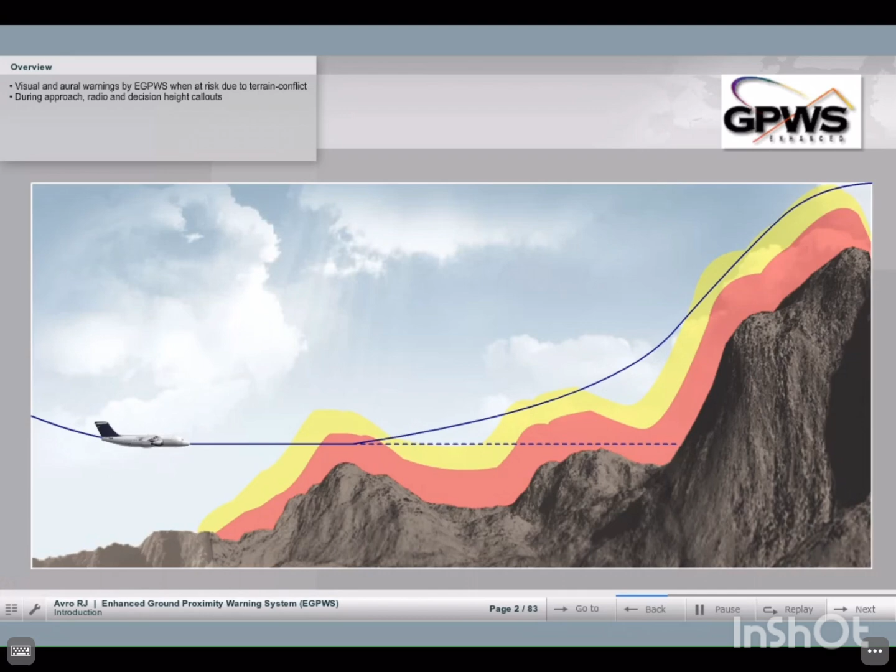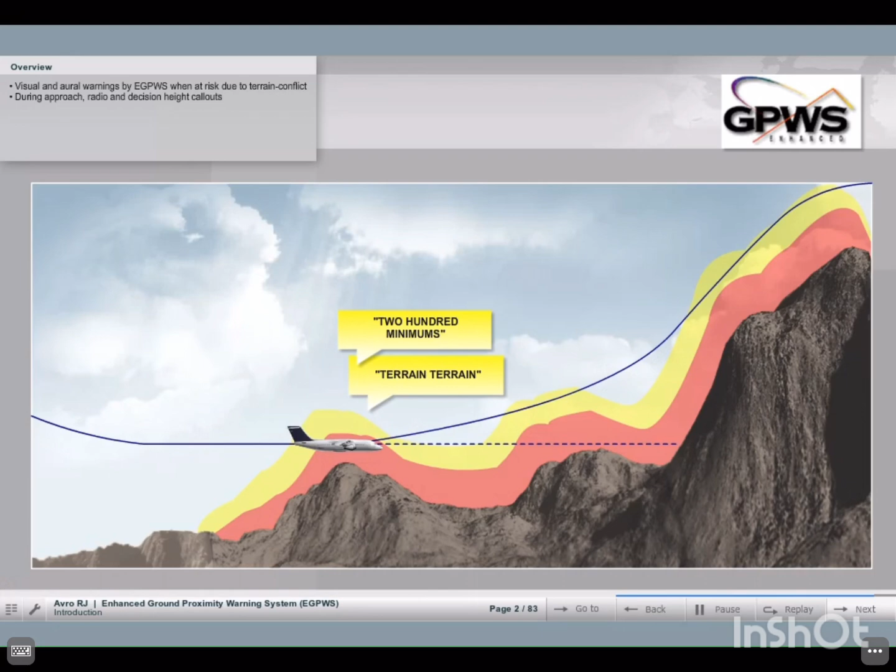The Enhanced Ground Proximity Warning System, EGPWS, is designed to give both visual and aural warnings when the safety of the aircraft is considered to be at risk due to possible conflict with terrain. Terrain, pull up. During the approach phase, EGPWS also gives radio altitude and decision height callouts. 200 minimums.

EGPWS incorporates the functions of the basic GPWS as well as intelligent, enhanced alerts computed through comparison of position and flight path data with an internal terrain and obstacle database.

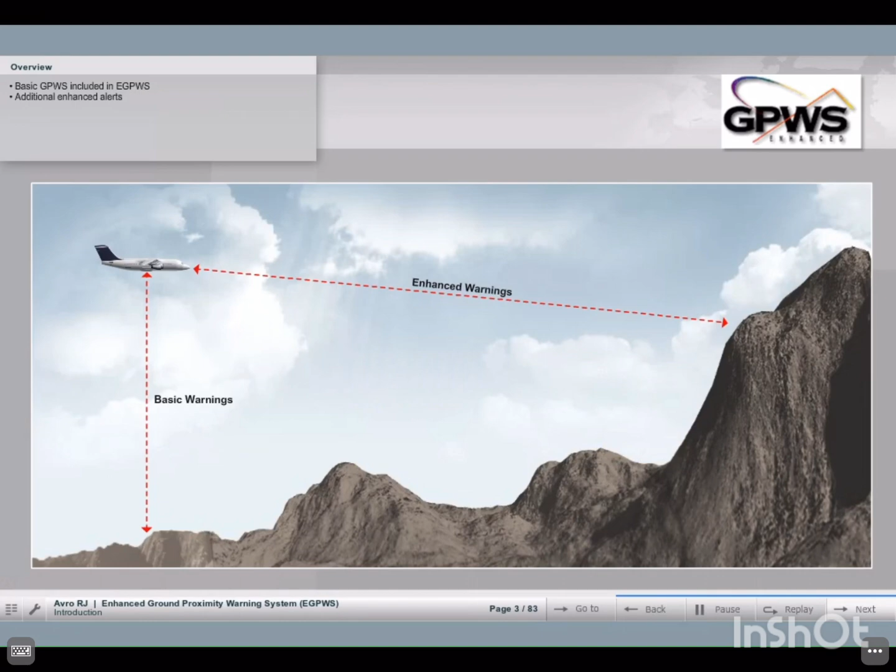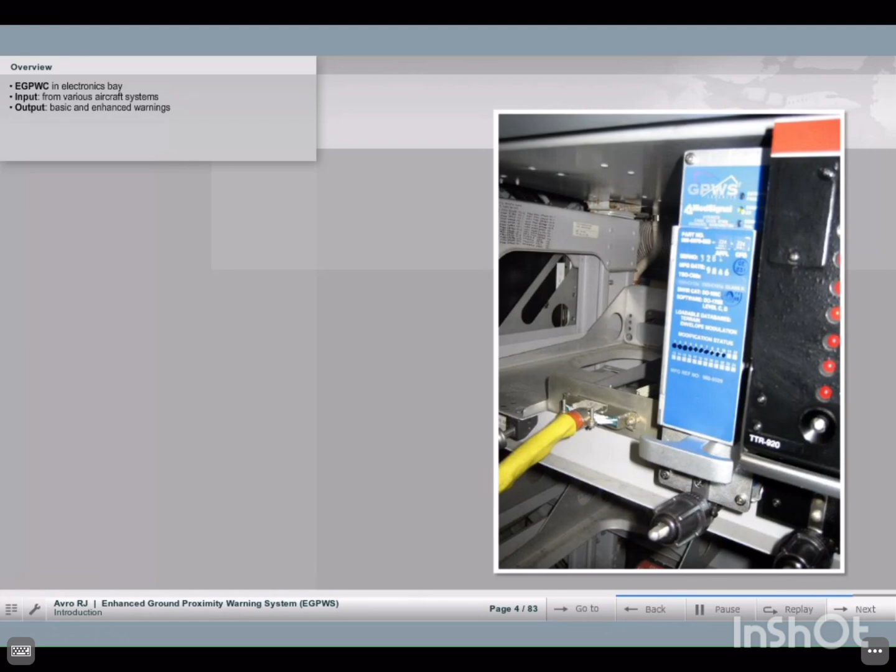The heart of the EGPWS is the Enhanced Ground Proximity Warning Computer, located in the electronics bay under the flight deck. It receives input data from several aircraft systems and releases both basic and enhanced warnings. Visual commands are given via annunciators on the glare shield and dedicated displays.

During this module, we refer to the navigation display as EGPWS Terrain Display.

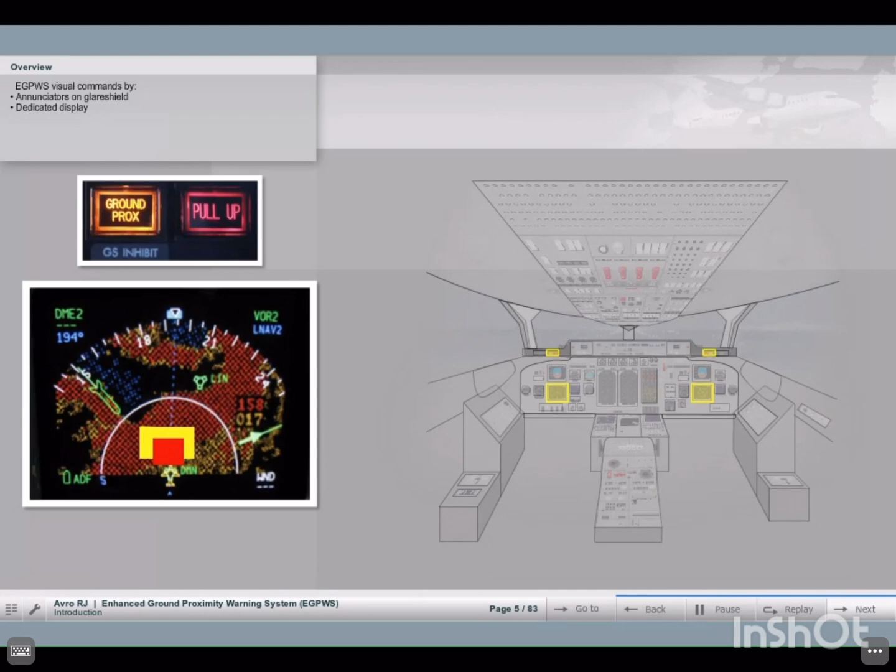Switches are available to modify the EGPWS for steep approaches, different landing flap settings, and to inhibit the enhanced functions.

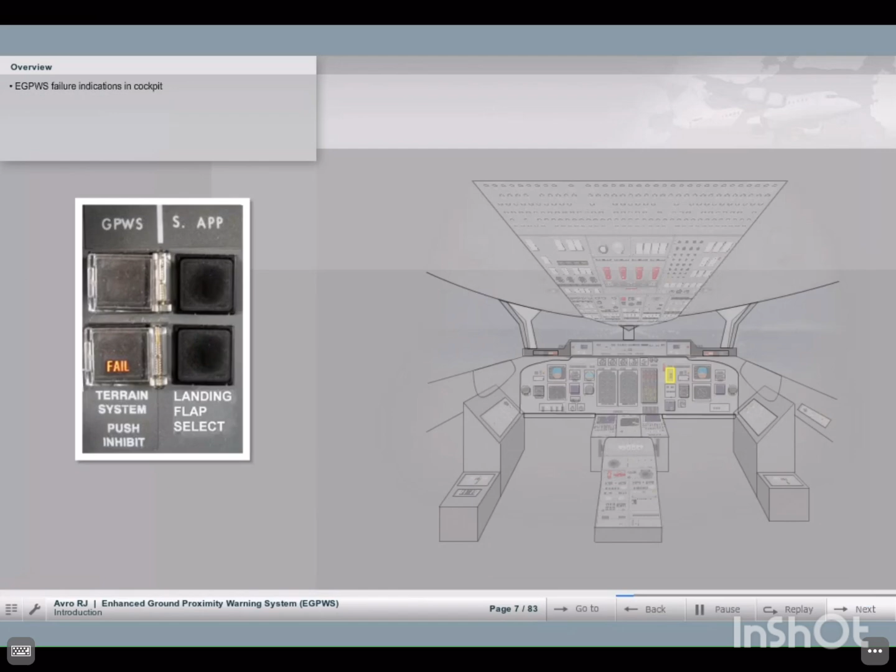There are cockpit indications to notify pilots in the event of failure of certain functions of the EGPWS.

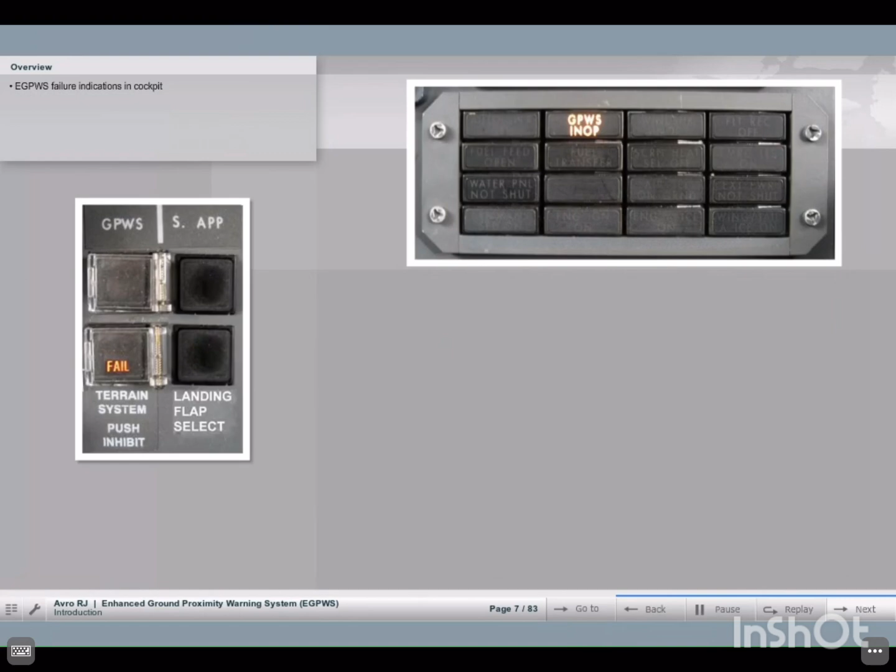A subsystem of the EGPWS is the Runway Awareness and Advisory System, RAAS. RAAS provides timely aural advisory messages to the flight crew in a significant number of scenarios that have led to runway incursion incidents and accidents.

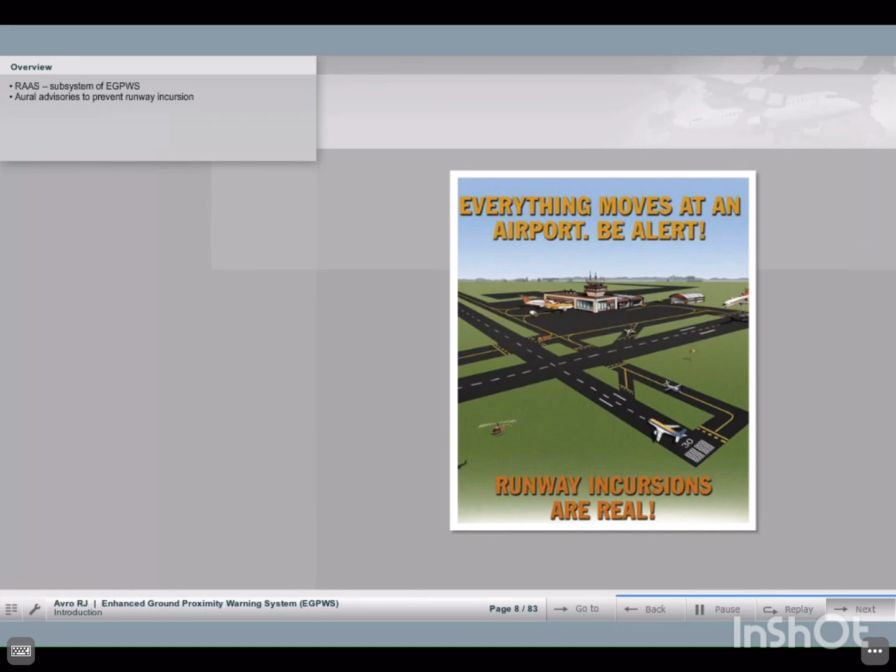The EGPWS uses input signals from various onboard systems. The full complement of these other systems depends on the EGPWS configuration and options selected. See the main inputs and outputs of both basic and enhanced warnings on the next pages.

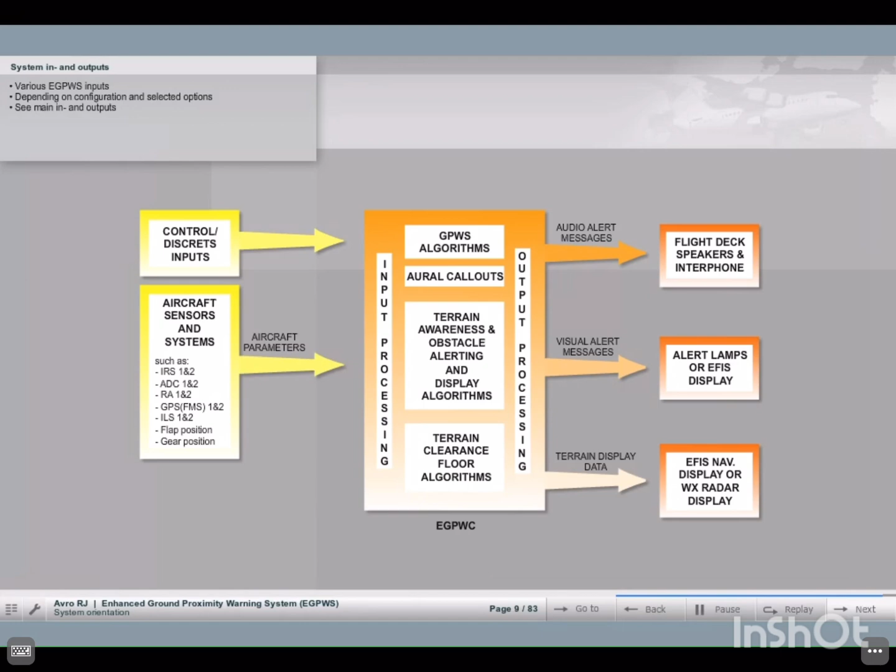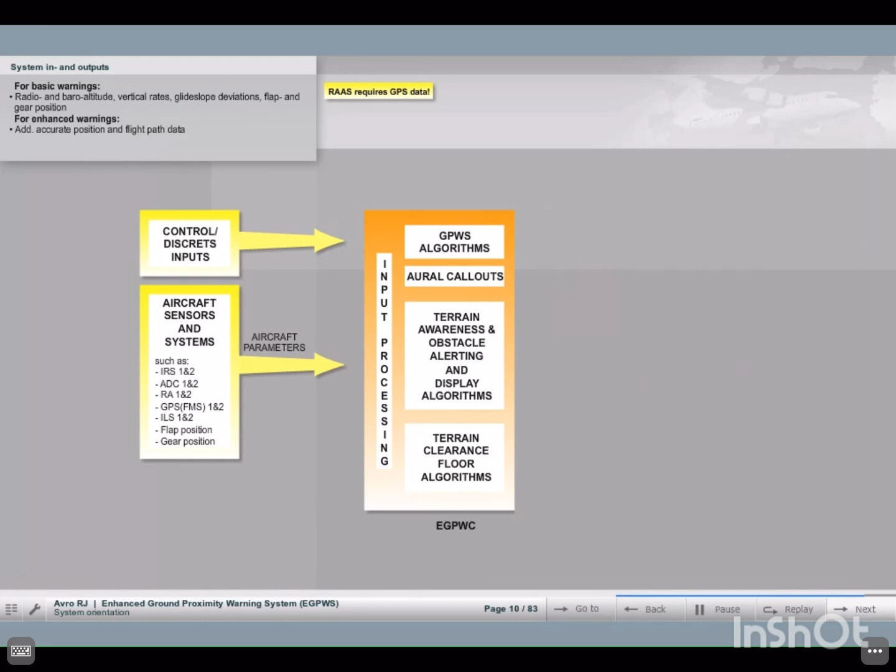EGPWS needs radio and barometric altitude, vertical rates, glide slope deviations, and flap and gear position for the provision of basic warnings. Enhanced warnings additionally need accurate aircraft position and flight path data, preferably GPS position with a backup from other FMS sensors.

The EGPWC processes all these data together with internal stored data, such as the internal terrain and obstacle database and warning envelopes. Pilots are provided with output data by audio and visual advisories, cautions, and warnings. This includes terrain display data on a dedicated display.

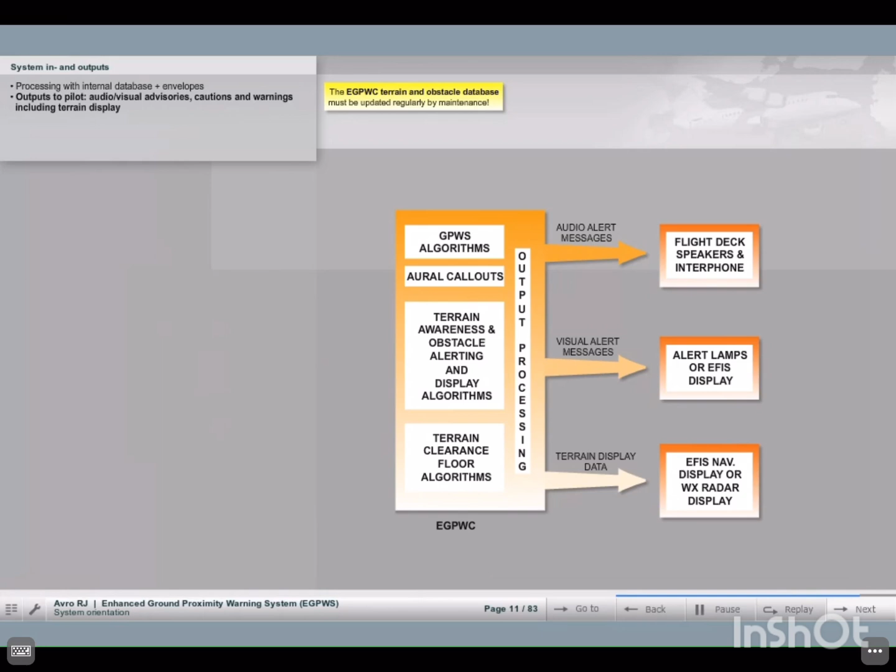6 basic modes are provided to protect the aircraft throughout all phases of flight. Modes 1 to 5 are caution or warning modes, and Mode 6 consists of advisory callouts.

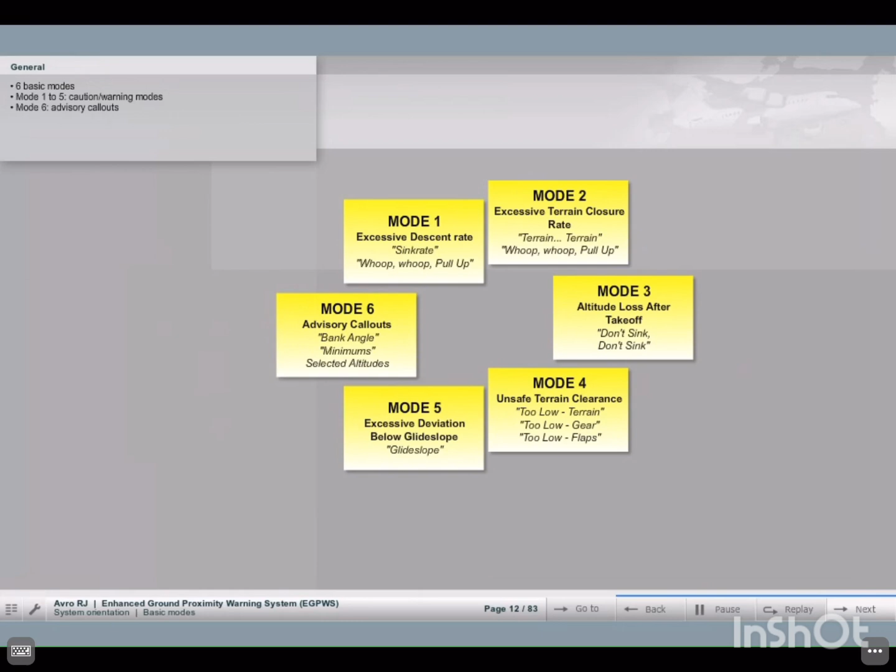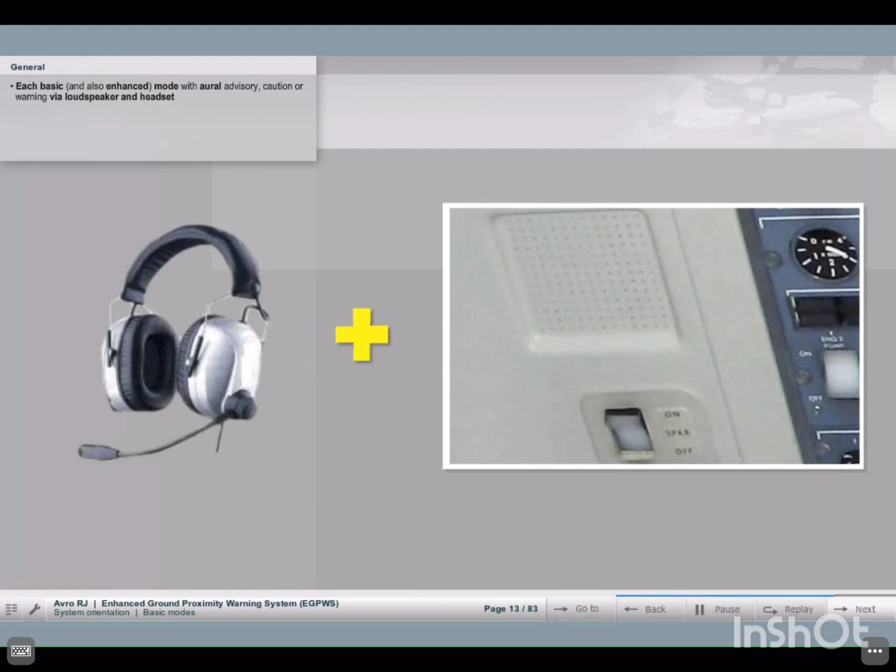Each basic and also each enhanced mode is accompanied by its respective aural advisory, caution or warning transmitted over both cockpit loudspeakers on the overhead panel and the flight crew's headsets.

Additionally, the basic modes 1 to 5 are accompanied visually by illumination of either an amber ground prox caution or a red pull-up warning annunciator, located both on the left and right side of the glare shield. Note that the dedicated terrain display is not involved during basic mode warnings.

Each mode is defined by an envelope which is stored within the EGPWC. The envelope can be regarded as a graph of minimum terrain clearance against other aircraft parameters. Different levels of alerts are provided by dividing the envelope into more than one area.

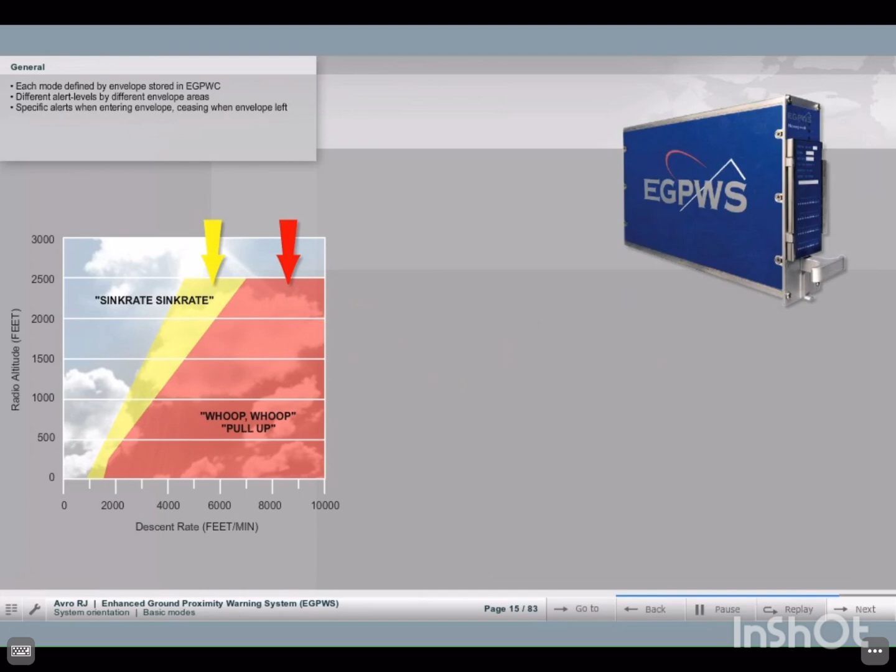Specific cautions and warnings are issued when the aircraft enters the respective envelope area and cease when the envelope is left. Sink rate, sink rate. Pull up.

Basic mode envelope modulation is made by use of airspeed, gear, and flap position.

Mode 1 provides alerts for excessive descent rates with respect to altitude AGL and is active for all phases of flight. Radio altitude from radio altimeter 1 or 2 is compared to descent rate derived from IRS 1 or 2. When IRS data is not available, vertical rates from ADC 1 or 2 are used.

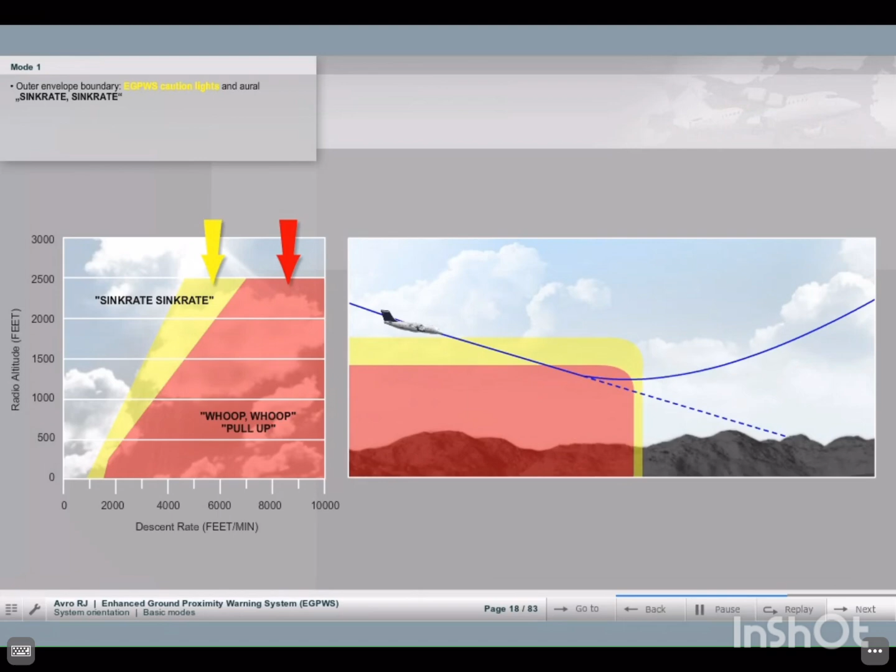This mode has inner and outer alert boundaries as illustrated in the diagram and graph. Penetration of the outer boundary activates the EGPWS caution lights and the sink rate aural alert until the outer boundary is exited. Sink rate, sink rate.

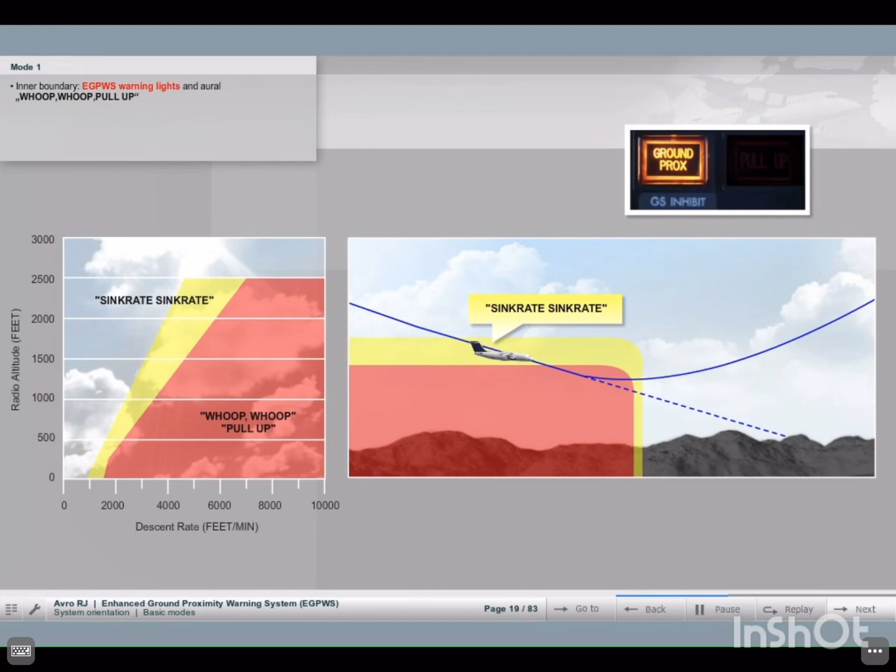Penetration of the inner boundary activates the EGPWS warning lights and changes the audio message to Pull up, which repeats continuously until the inner warning boundary is exited.

Many aircraft have the steep approach option fitted. It prevents nuisance warnings by allowing higher descent rates associated with approach angles from 4.5 up to 6 degrees by modulating the Mode 1 warning envelope.

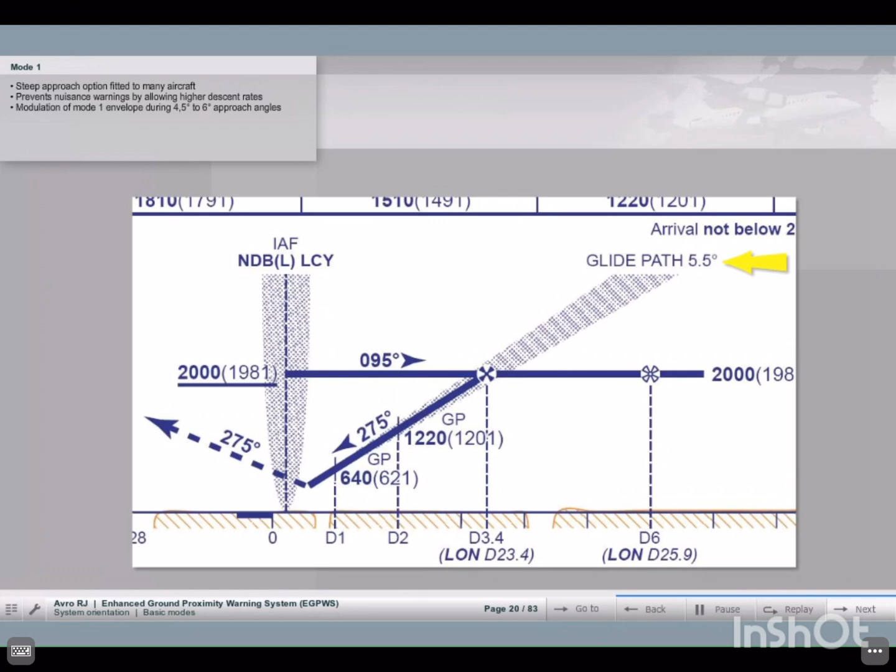Pressing the steep approach button on the right flight instrument panel arms the system and S.APP is annunciated white. Mode 1 envelope modification is active when S.APP turns green. For this, the aircraft must be in flight, flaps set to 33, and gear lowered.

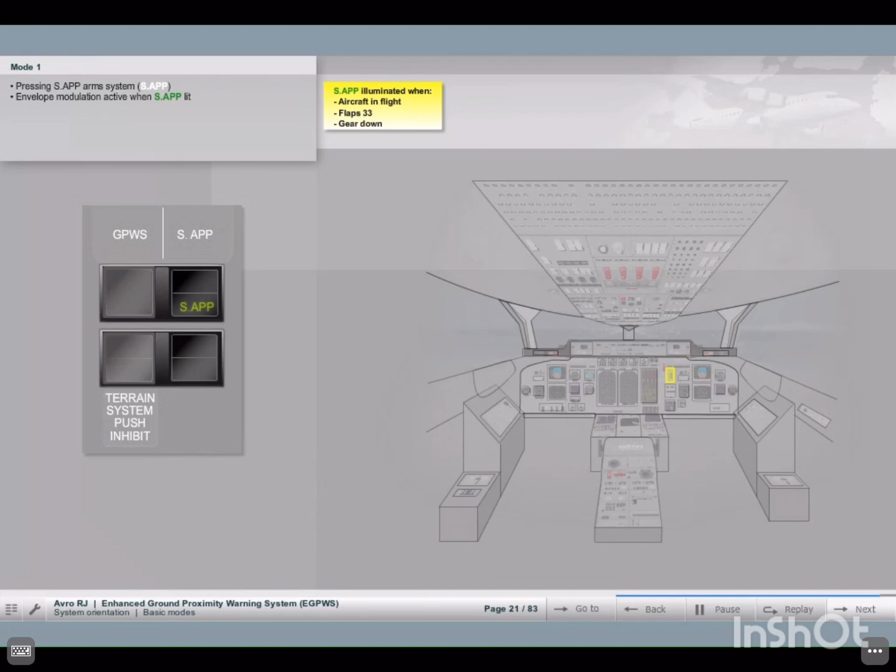Mode 2 provides alerts to help protect the aircraft from impacting the ground when rapidly rising terrain with respect to the aircraft is detected. Mode 2 is based on radio altitude and on how rapidly radio altitude is decreasing, closure rate. Mode 2 exists in two forms, 2A and 2B.

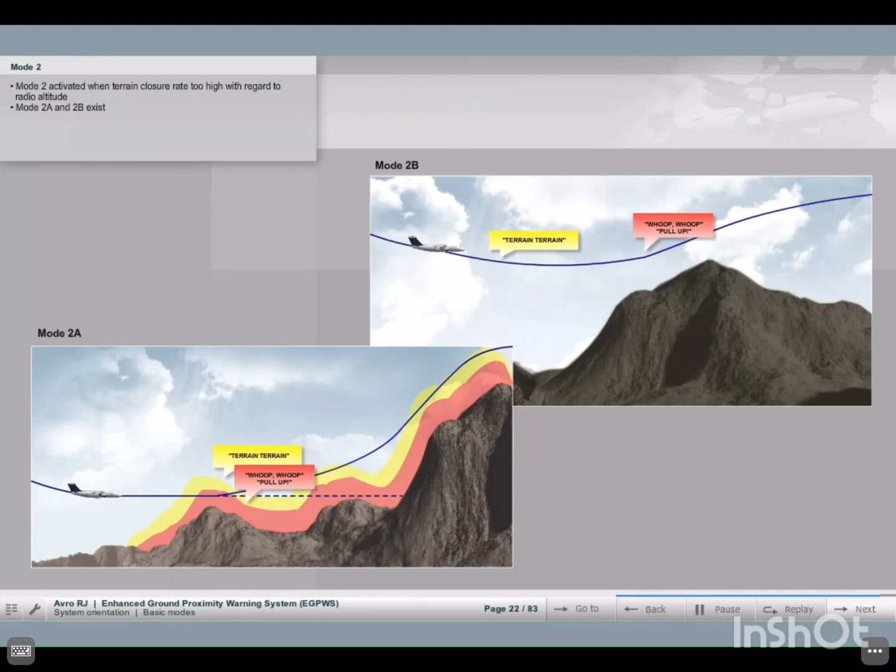Mode 2A is active when flaps are up and the aircraft is not on glide slope. If the aircraft penetrates the outer envelope, the aural message Terrain, terrain is generated and the EGPWS caution lights will illuminate. If the aircraft continues to penetrate the inner envelope, the EGPWS warning lights will illuminate and the aural warning message Pull up is repeated continuously until the warning envelope is exited.

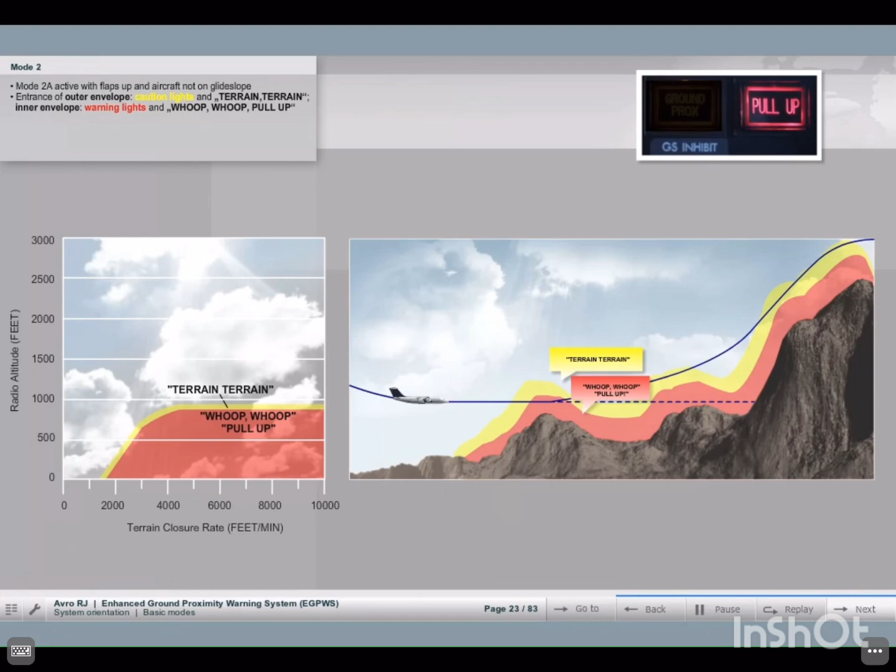Mode 2B provides a desensitized alerting envelope to permit normal landing approach maneuvers close to terrain without unwanted alerts. Mode 2B is automatically selected with flaps in the landing configuration, or when making an ILS approach with glide slope deviation less than 2 dots, or when the aircraft is near an airport contained in the database.

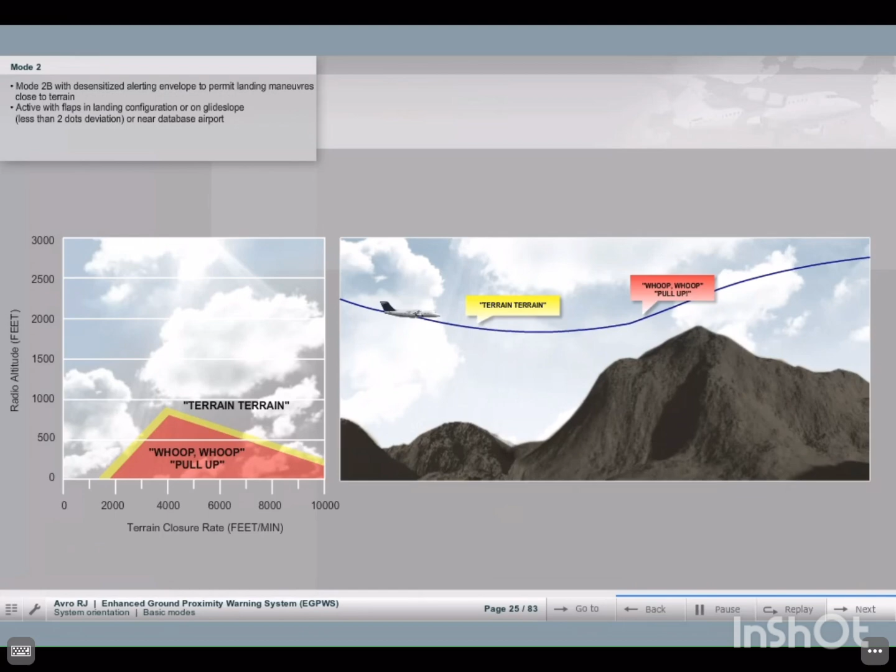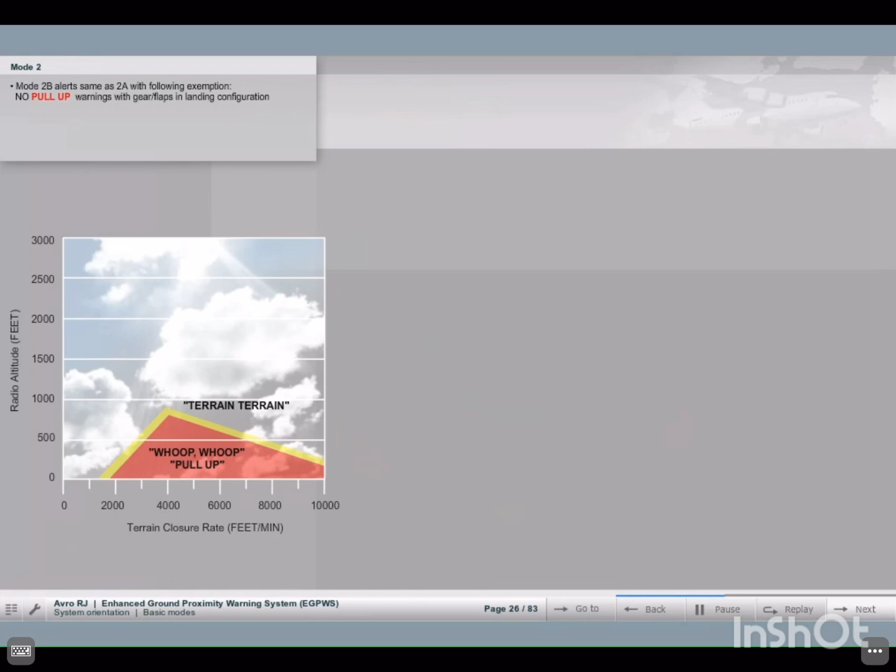The Mode 2B cautions and warnings are the same as for Mode 2A, with one exception. If the aircraft penetrates the Mode 2B envelope with both gear and flaps in the landing configuration, the aural Pull up messages are suppressed and the aural message Terrain is repeated until the envelope is exited.

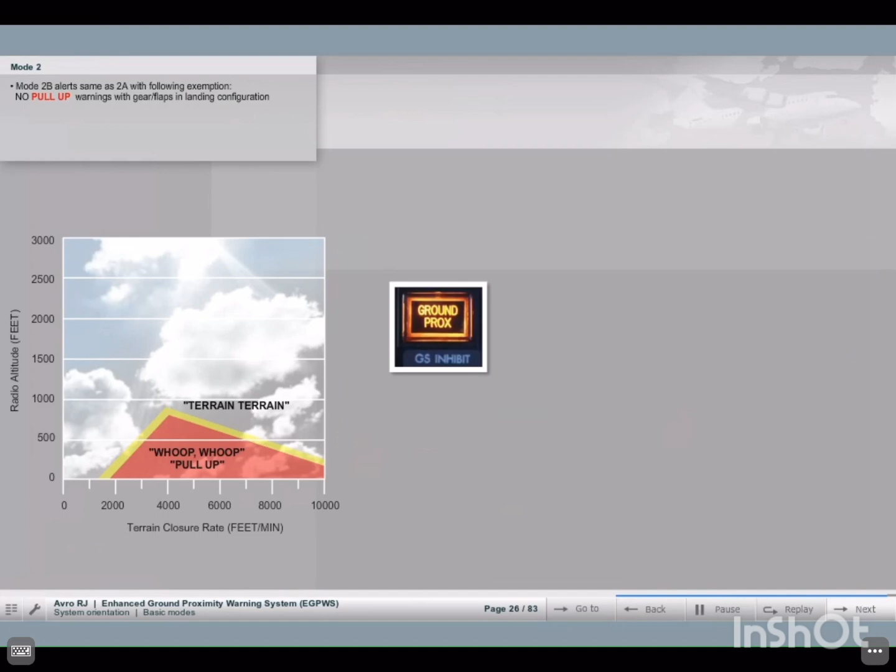Mode 3 provides alerts for significant altitude loss after takeoff or low altitude go-around with gear or flaps not in the landing configuration. The amount of altitude loss is calculated from IRS 1 or 2 inertial altitude and is compared to radio altitude from radio altimeter 1 or 2.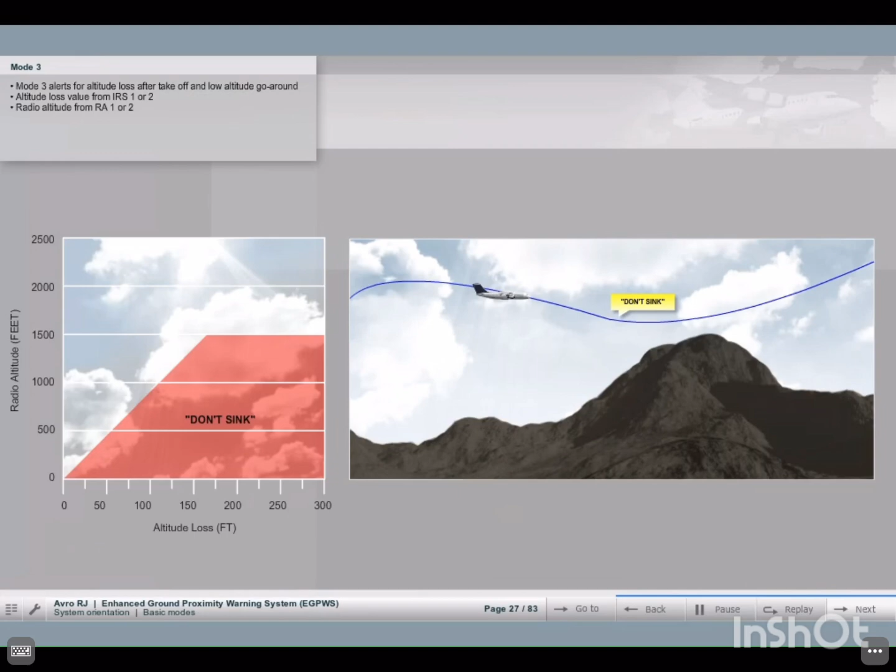The amount of altitude loss that is permitted before an alert is given is a function of the height of the aircraft above the terrain and is about 10% of the gained radio altitude. Significant altitude loss after takeoff or during a low-altitude go-around activates the EGPWS caution lights and the oral message, Don't sink, don't sink. Upon establishing a positive rate of climb, the EGPWS caution lights extinguish and the oral alert will cease.

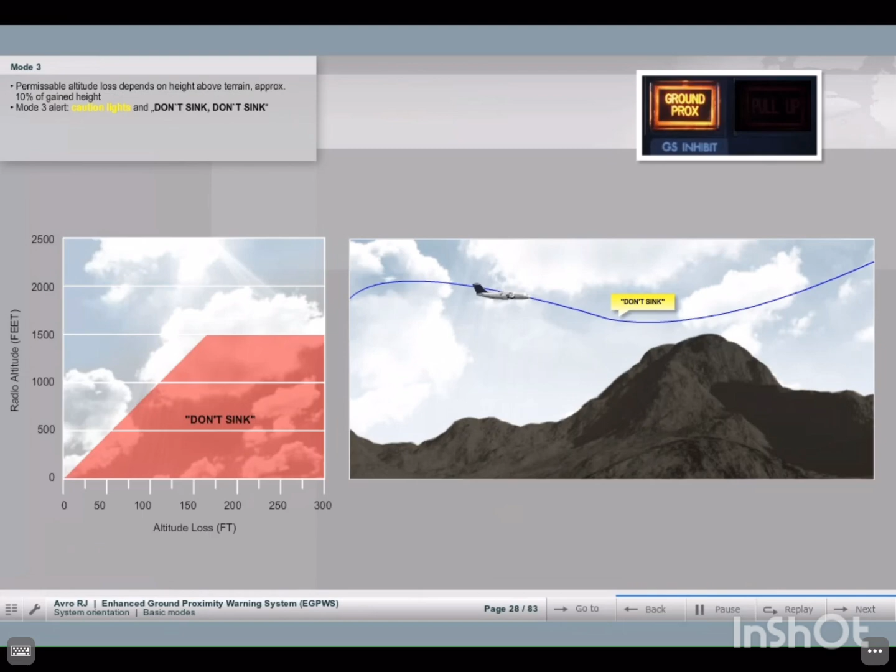Mode 4 provides alerts for insufficient terrain clearance with respect to phase of flight, configuration, and speed by aid of an envelope based on radio altitude against airspeed. Mode 4 alerts are triggered when vertical speed or terrain closure rate are too weak for a Mode 1 or 2 alert, and exists in three forms: 4A, 4B, and 4C.

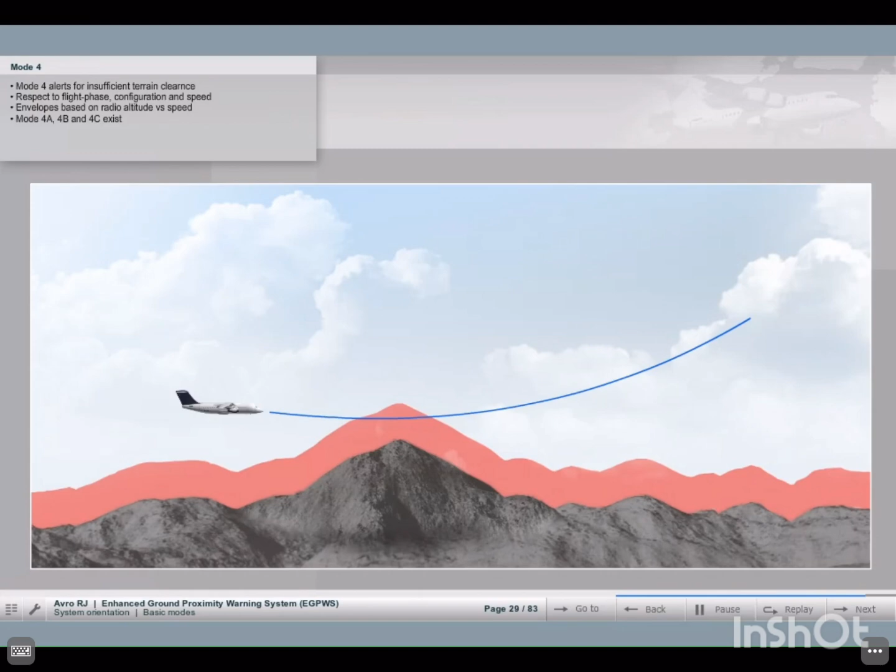Mode 4A is active during cruise and approach with the gear and flaps up, below 1,000 feet AGL and above 190 knots airspeed. The Mode 4A oral alert is Too low terrain. Below 500 feet AGL and less than 190 knots airspeed, the oral alert is Too low gear. Both alerts are accompanied by the EGPWS caution lights and cease when the envelope is exited.

Mode 4B is active during cruise and approach, with gear down and flaps not in the landing selection. Below 1,000 feet AGL and above 159 knots airspeed, the Mode 4B oral alert is Too low terrain. Below 245 feet AGL and less than 159 knots airspeed, the oral alert is Too low flaps. Both alerts are accompanied by the EGPWS caution lights and cease when the envelope is exited.

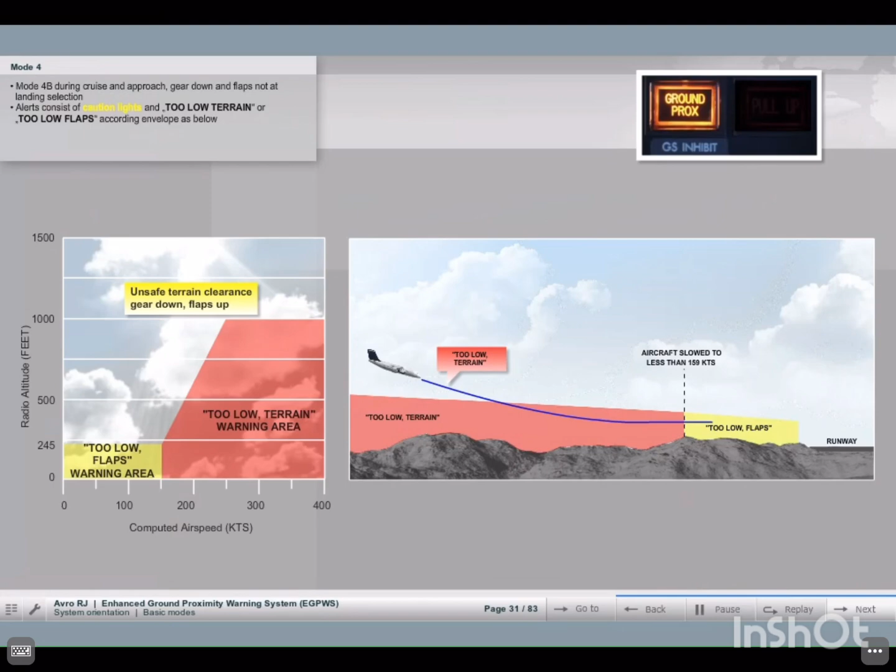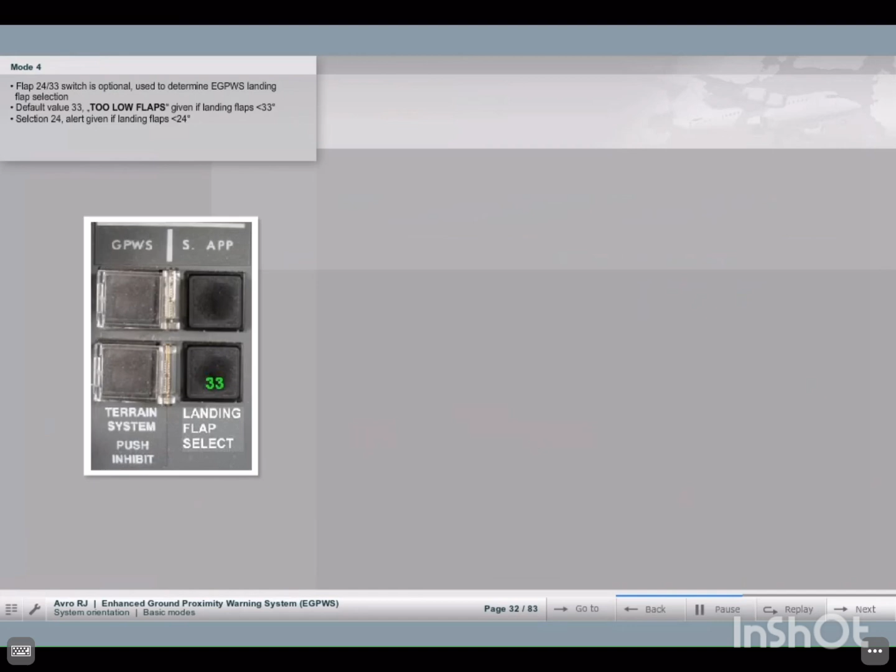The Flap 24/33 selection switch is a customer option. It is used to determine a landing flap setting for the EGPWS. The default value is 33. The too low flaps alert will sound when landing at any other flap setting than 33 is attempted. Pressing this switch will select 24. The warning is triggered when a landing of flap 0 or 18 is attempted.

The EGPWS flap warn override switch, guarded by a transparent cover, is installed to inhibit the too low flaps alert when pressed. The alert is then inhibited irrespective of the landing flap setting.

Mode 4C is based on an EGPWS Computed Minimum Terrain Clearance Floor, MTC, that increases with radio altitude. It is active after takeoff when the gear or flaps are up and during a low-altitude go-around. At takeoff, the MTC is 0 feet. During climb, the MTC is increased to 75% of the aircraft's radio altitude. This value is not allowed to decrease and is limited to 500 feet AGL for airspeed less than 190 knots. Beginning at 190 knots, the MTC increases linearly to the limit of 1,000 feet at 250 knots.

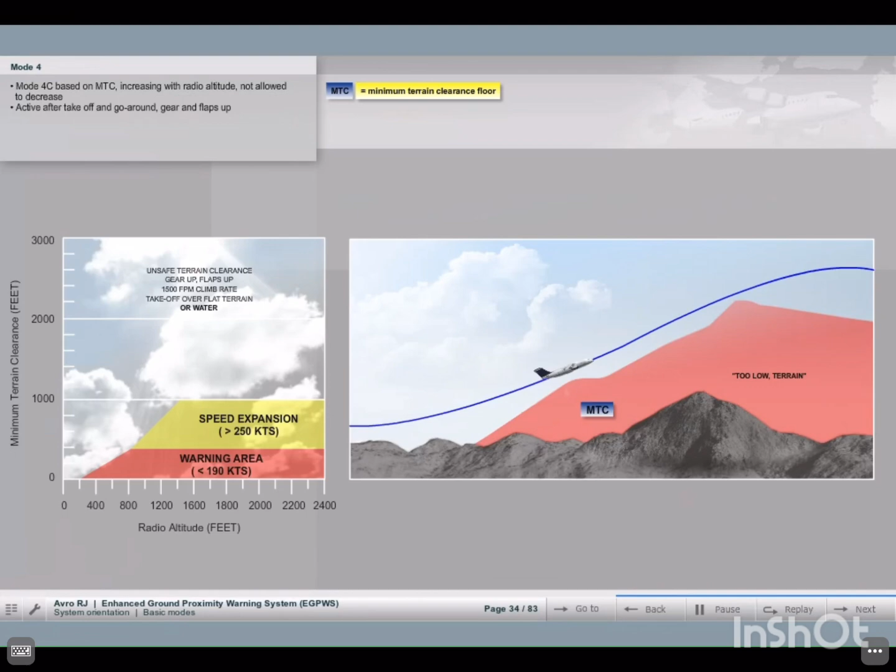If the aircraft's radio altitude decreases to the value of the MTC, the EGPWS caution lights illuminate and the oral message, Too low terrain, sounds. EGPWS caution lights extinguish and oral messages cease when the Mode 4C alert envelope is exited.

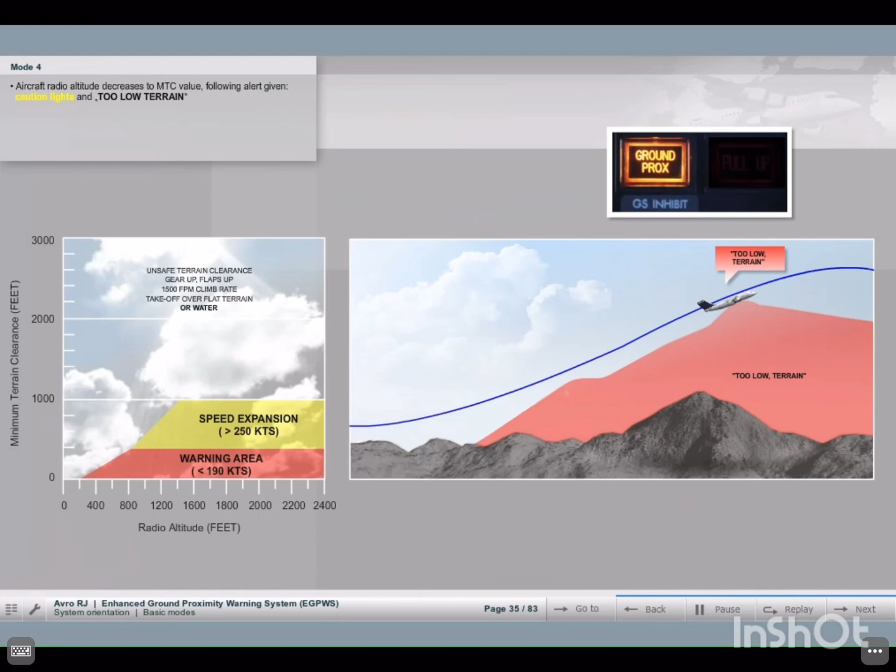Mode 5 provides two levels of alerting for when the aircraft descends below glide slope, resulting in activation of EGPWS caution lights and oral messages. The first level alert occurs when below 1,000 feet radio altitude and the aircraft is 1.3 dots or greater below the beam. This turns on the caution lights.